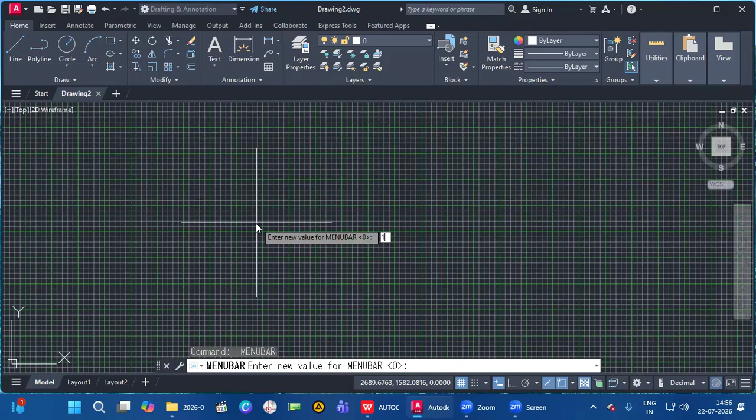To close menu bar, enter, value 0, enter. To show menu bar, space bar to repeat previous command, value 1, enter. Up to menu bar, completed.

So next, display command line window, hide command line window. For hiding command line window, control plus 9 plus enter. To show command line window, control plus 9.

Control plus 9, enter. On bottom center, command line hidden. Control plus 9 again, bottom center command line visible.

Display status bar, hide status bar. If you want to hide status bar, if you want to hide navigation cube: status bar enter, enter value 1 enter, status bar enter, enter value 0 enter, navigation bar enter, enter value on enter.

Let's execute. For closing status bar, enter, type value here 0 enter, totally closed. To show again status bar, enter value 1 enter.

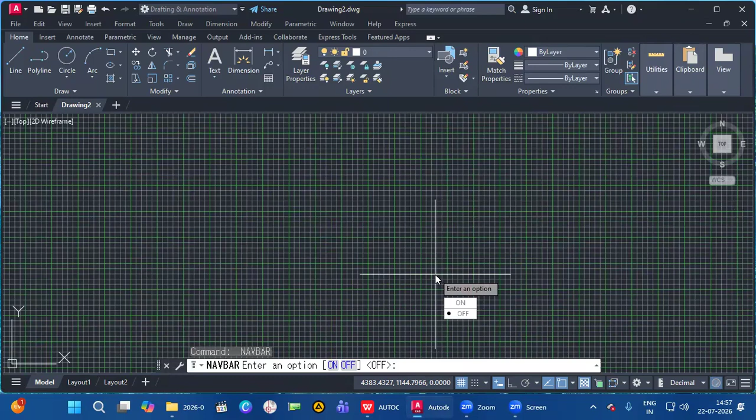To hide navigation bar, type a command, nav bar enter, value OFF enter, space bar, on, enter. Move to next session: nav bar enter, enter value off enter.

Display navigation cube enter and set value on. For turn off, OFF. Nav cube enter, OFF, on. Nav bar enter, OFF. Nav bar enter, on.

Display tool palette. Control plus 3 or TP. Control plus 3, tool palette window appears. Or command type TP enter.

Tool palette. Select any options.

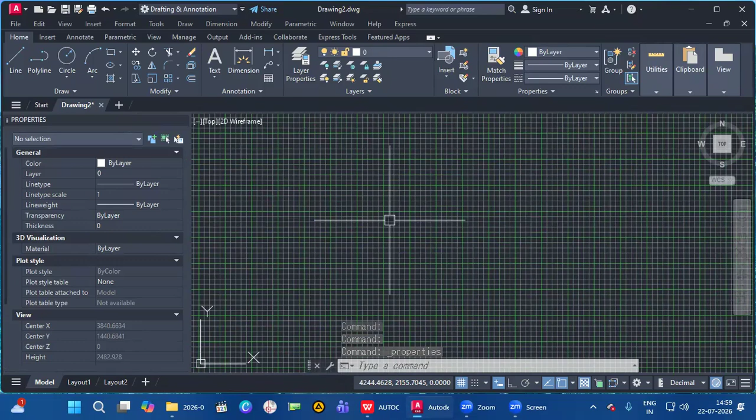Property palette, control plus 1, to check properties of drawing object. First you have to select the object, control 1, to check all properties.

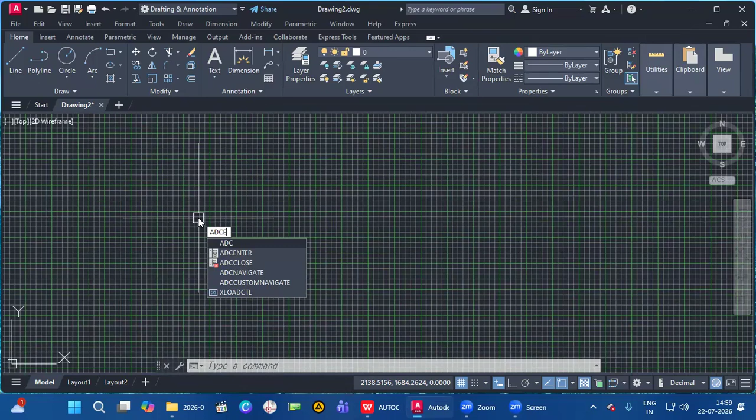And next here, display design center. Display design center, control 2, design center window enabled. ADC enter, design center window enabled. ADCENTER, Design Center.

How to turn off grid line, how to show grid line: press function F7. Turn off, F7, turn on.

Display model tab and layout tab. To activate layout tab, type a command here, layout tab, enter, value 0, enter. Layout tab hidden. 1, enter, layout tab shown.

Next here, model tab, no, only layout tab. Okay, no problem. Display layout tab.

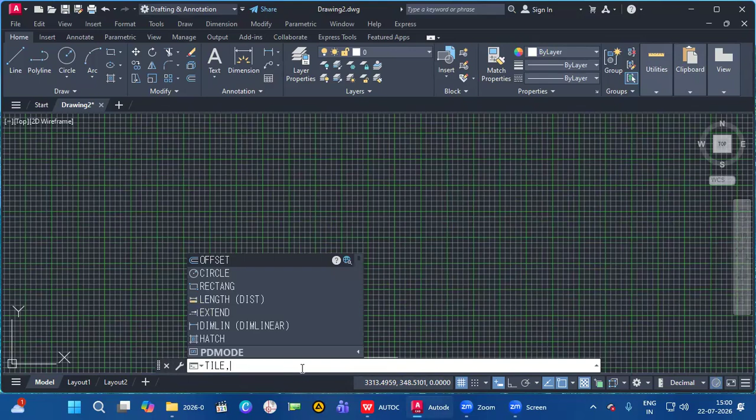Type a command, tile mode, enter. Value set 0, enter. Space bar to repeat, tile mode 1, enter, to activate model space.

Under model space, creation of drawing. Under layout space, modification and printing of drawing.

Proceed to next session.

Display viewport control, hide and show. For show, on, enter. For hide, off, enter. VP control, enter, enter value on or off.

Below, on the drawing file tab, left corner, three options: viewport control, view control, visual style. How to close it? VP control, enter, value OFF, enter, totally closed. Space bar, value set on, totally on.

How to clear and show a screen? Control 0, ribbon and drawing file tab simultaneously close. Control 0 again, simultaneously on: drawing file tab and ribbon.

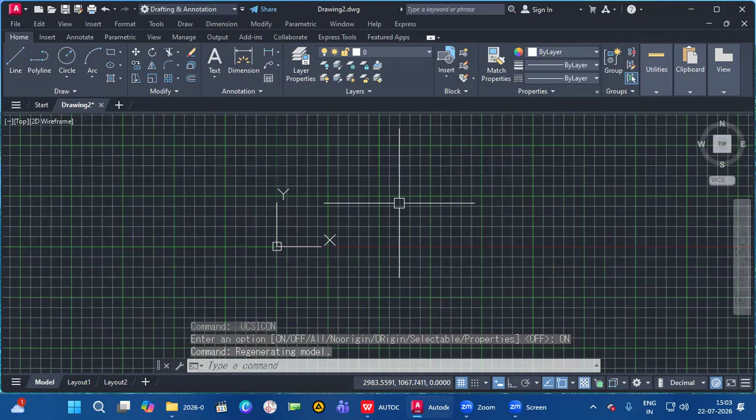How to close and show UCS? UCS icon, user coordinate system icon. For turn off, OFF, enter. Space bar, for turn on, enter. To set no origin or origin, space bar, origin.

OR, enter. Space bar, no origin, N, enter. To check a style of axis system, go to properties, P, enter. Current size 81, line width 1. If you want to change, you can change it. Okay.

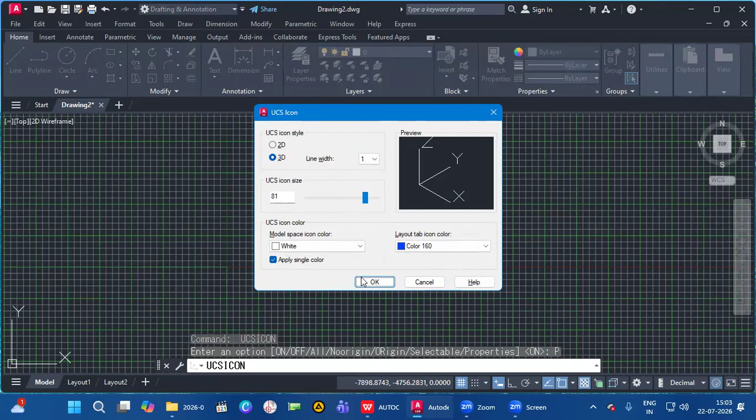Model tab, layout tab, interval. Display the model and layout tab. If the entire AutoCAD interface is missing, type workspace and press enter. Select drafting and annotation. If needed, type WS current and choose drafting and annotation.

Type ribbon and press enter. To restore the ribbon, reset AutoCAD to default workspace. If many tools are missing or the interface is corrupted, switch to the drafting and annotation workspace.

So now proceed to next session: workspace. In AutoCAD we have three workspace options: drafting and annotation, 3D basics, 3D modeling, AutoCAD classic. What is the first process?

Type menu bar, value 1, go to tool, workspace, select drafting and annotation. Second one: go to customize quick access toolbar, enable workspace, then go to workspace option, drafting and annotation.

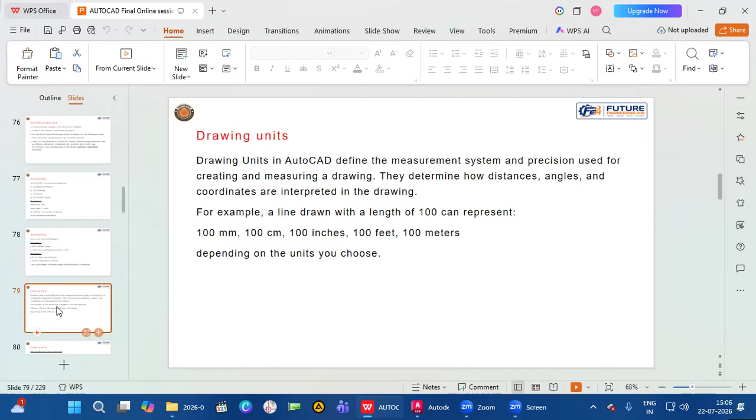So next, proceed to next session, talk about drawing units. Drawing units in AutoCAD define the measurement system and precision used for creating and measuring a drawing. They determine how distance, angle, and coordinate are interpreted in the drawing. For example, a line drawn with a length of 100 units can represent 100 mm, 100 centimeters, 100 inches, 100 feet, or 100 meters, depending on the unit you choose.

Why are drawing units important? Drawing units are used to maintain accurate dimensions, create drawings at the correct scale, and ensure compatibility with other CAD drawings, avoid measurement errors, and prepare drawings for manufacturing and construction.

How to open drawing units? First method is 'UN' enter (Units). Second method: go to application menu, drawing utilities, units, drawing unit box. The unit dialog box contains the following options. All linear measurements are displayed, for example decimal, architectural, engineering, fractional, scientific. Length precision controls the number of decimal places displayed.

Let's see here. First is the unit, you can enter and set whatever the properties. There are different types with different precision. According to type, precision changes.

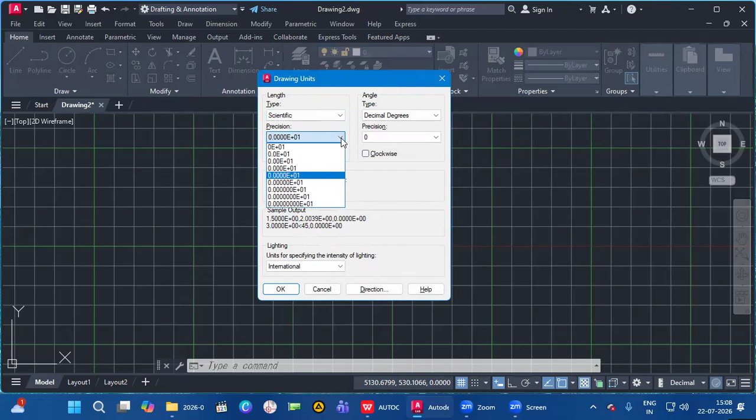Decimal, this is zero decimal precision. Architecture shows feet and inches, engineering shows decimal feet and inches, fraction, scientific, with an exponent value. So this is the first method.

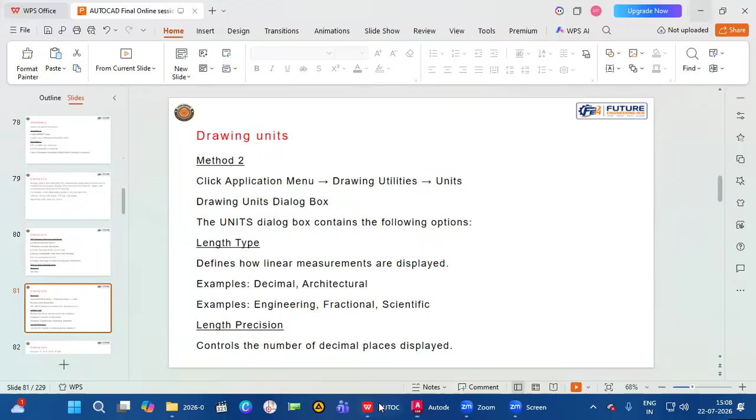Second method: application menu, drawing utilities, units. Here you can change all settings, for example 10, 10.0, 10.00, 10.000. Following that, angle type defines how angles are measured: decimal degree, degree-minute-second, radian, grad, surveyor unit, whatever the properties, you can set and modify.

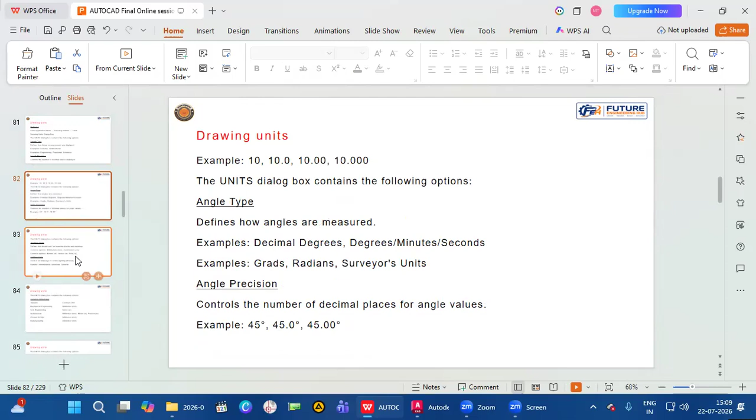Angle precision controls the number of decimals for angle value, for example 45 degree with 0 decimal, 45.0 degree, 45.00 degree. The unit dialog box contains the following steps.

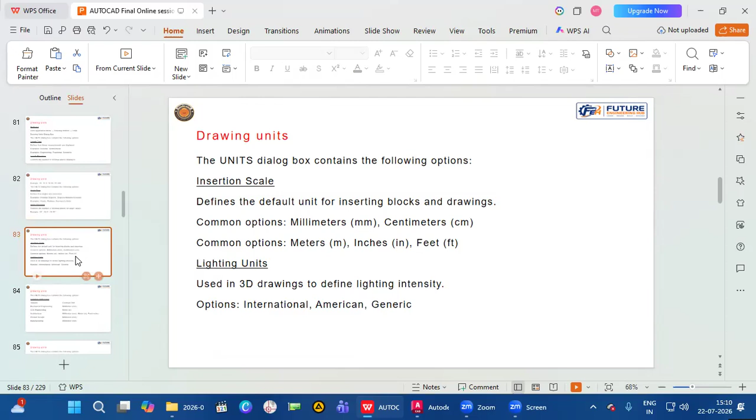Default unit for the insertion of blocks and drawing, common options: millimeter, centimeter, meter, inches, feet. Lighting unit used in 3D drawing to define lighting intensity, options: international, American, generic. Commonly used units by industries: mechanical engineering uses millimeter, civil engineering uses meter, architecture uses millimeter, meter, feet and inch, product design uses millimeter, manufacturing uses millimeter.